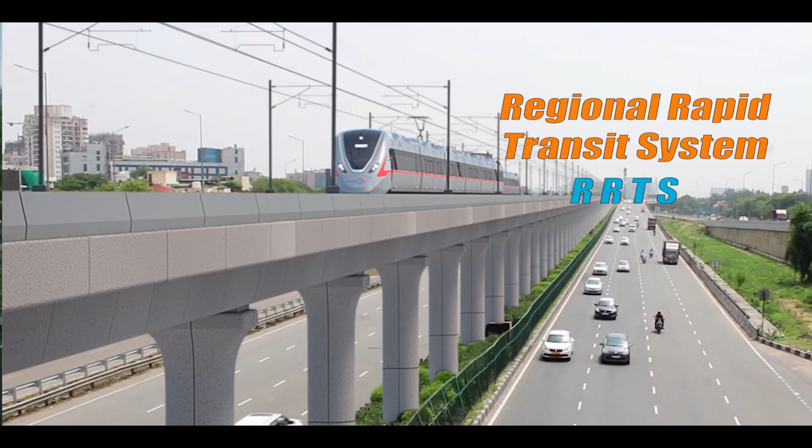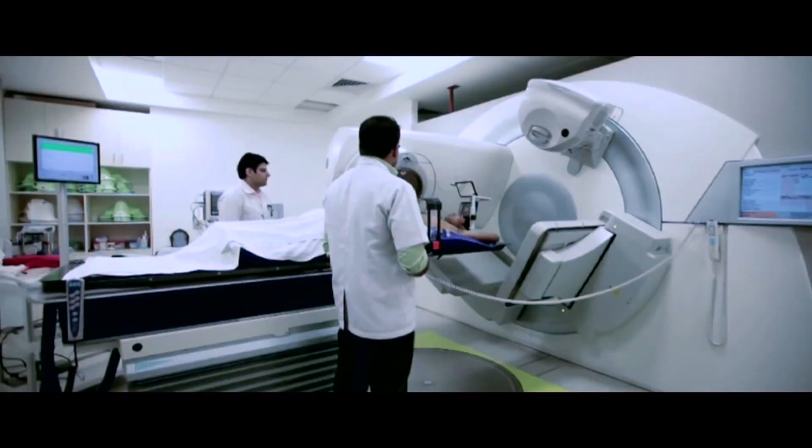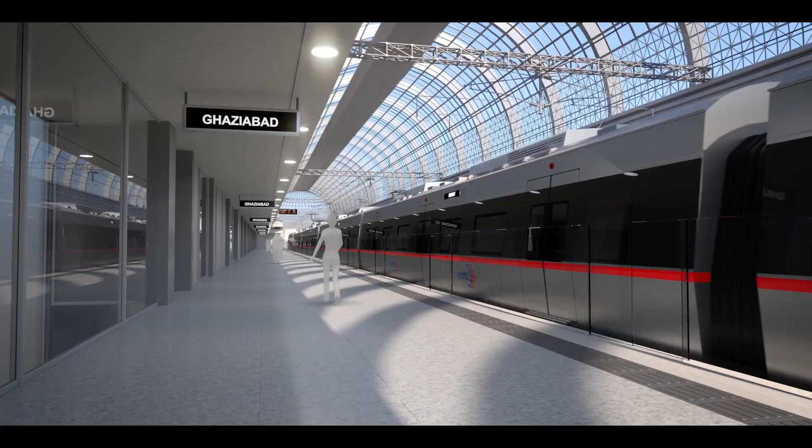RRTS, Regional Rapid Transit System, is a transformational urban transport project. It will empower people by providing them improved access to education, employment, healthcare and economic opportunities, and also address issues of pollution, congestion and ever-expanding urban sprawl. It aims to improve the quality of life of people by providing fast, reliable, safe, comfortable and sustainable mobility solution, enabling economic development in NCR.

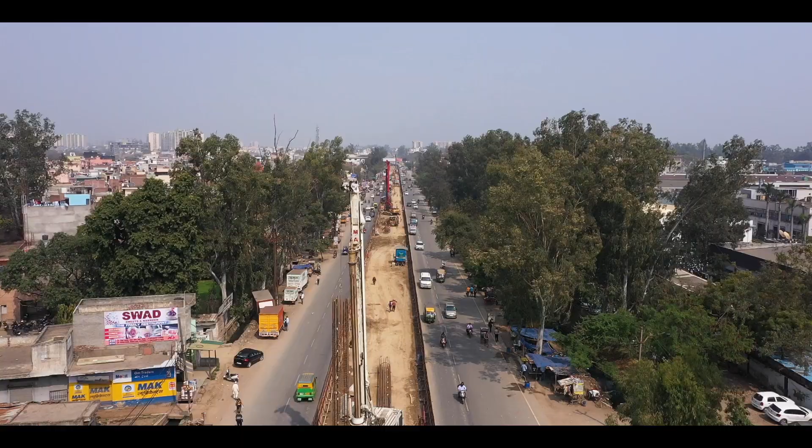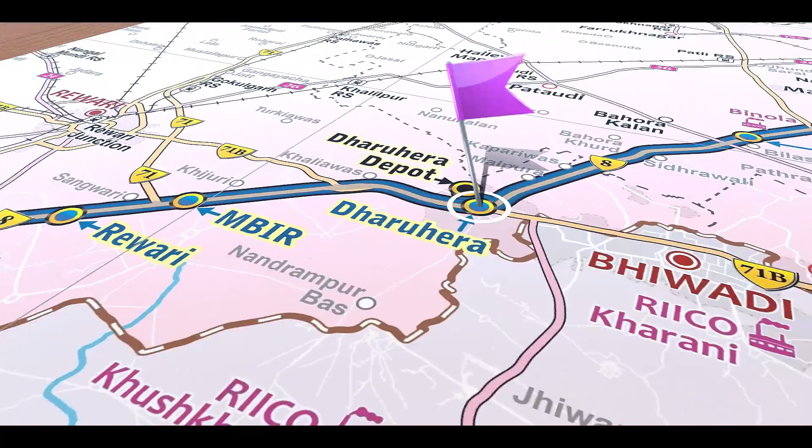NCRTC is constructing India's first regional rail network in its national capital region to connect regional urban centers such as Sahibabad, Ghaziabad, Meerut, Gurugram, Manesar, Dharuhera, Bawal and Panipat with national capital Delhi like never before.

RRTS is a high-speed railway system where the design speed is 180 km per hour. This kind of railway system has never been attempted in the country, neither by the Indian Railways nor by metro companies. So, due to lack of any benchmarking or common standards, it is a big challenge to implement this kind of project in a very short time frame.

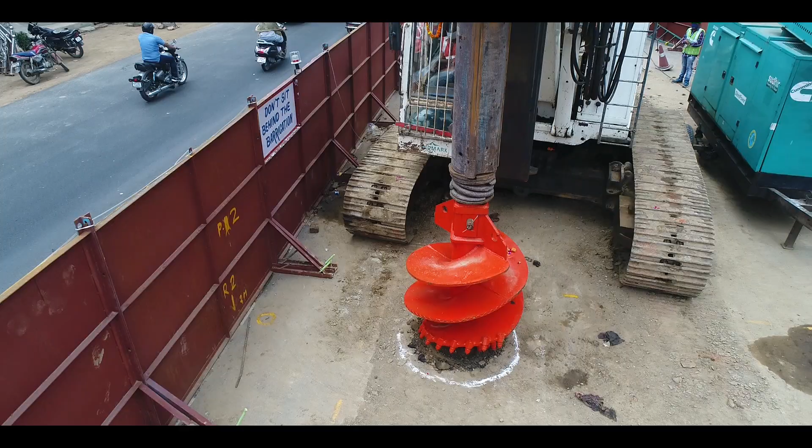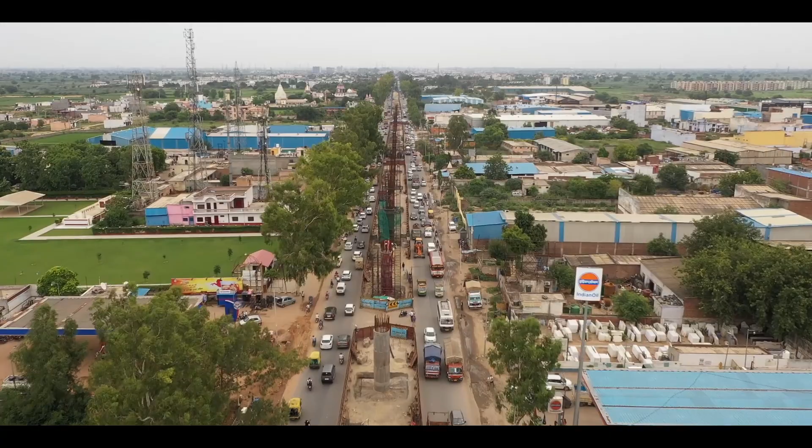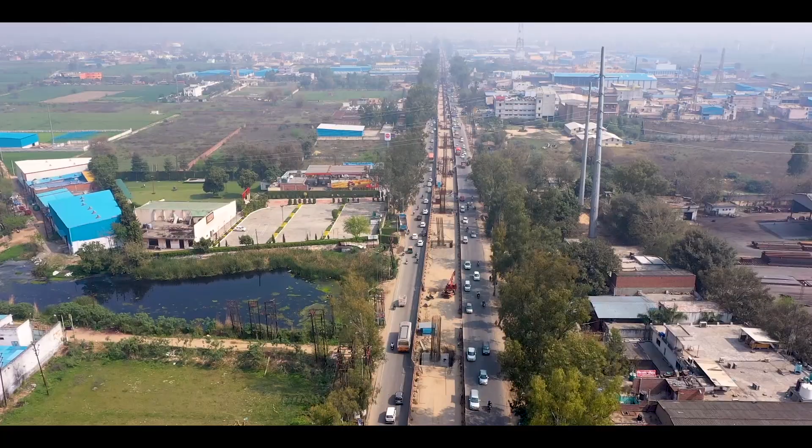Honorable Prime Minister laid the foundation stone of first RRTS corridor between Delhi, Ghaziabad and Meerut on 8th March 2019. Within 3 months, civil construction work was started in the true spirit of Gati se Pragati, so as to meet the challenging task of commissioning the 17 kilometer long priority section of the corridor from Sahibabad to Duhai by 2023. The entire 82 kilometer long Delhi Ghaziabad Meerut RRTS corridor will be operational in 2025.

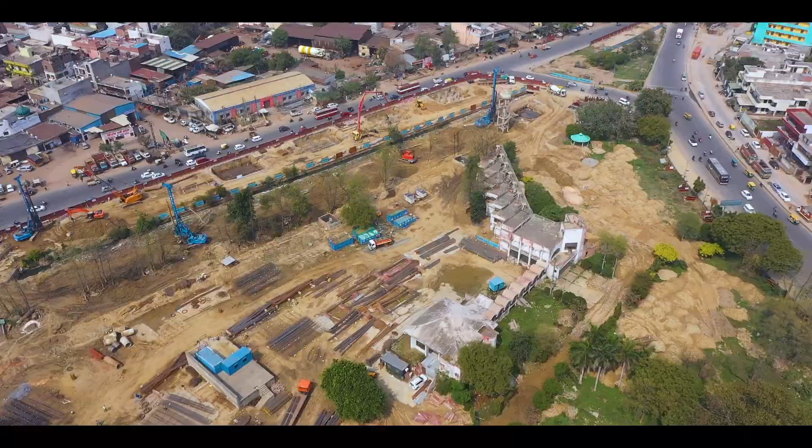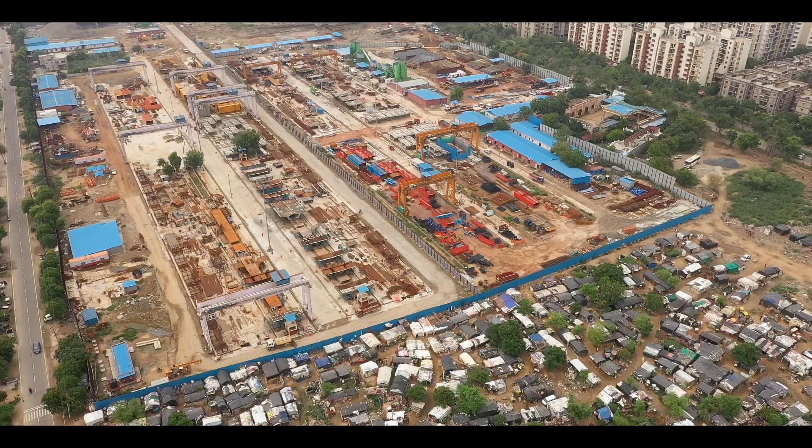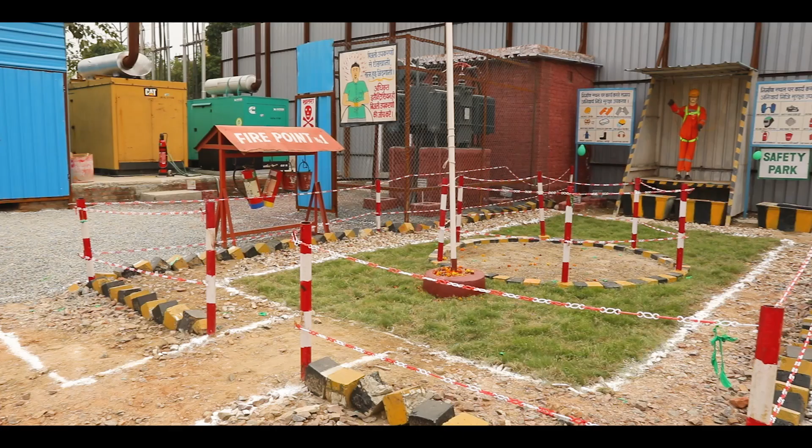In the past 1 year, NCRTC has made significant progress. Almost all pre-construction activities in the priority section have been completed. Project site offices have been established. State-of-the-art casting yards at Vasundhara, Ghaziabad have been set up for casting of segments, with facilities such as batching plant, quality labs, safety park, labor training and healthcare.

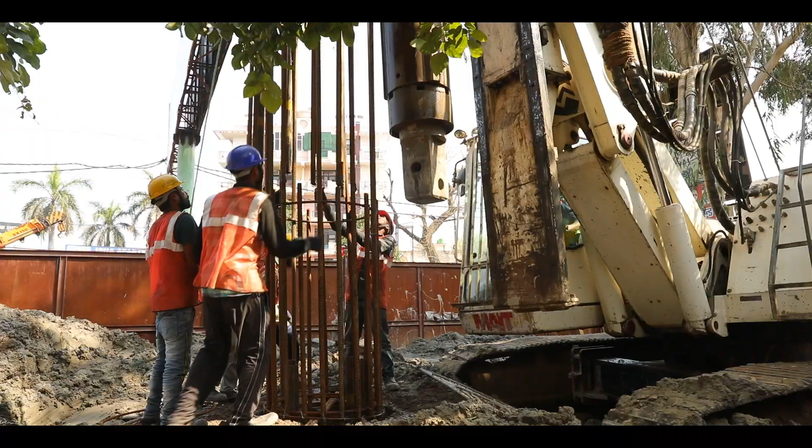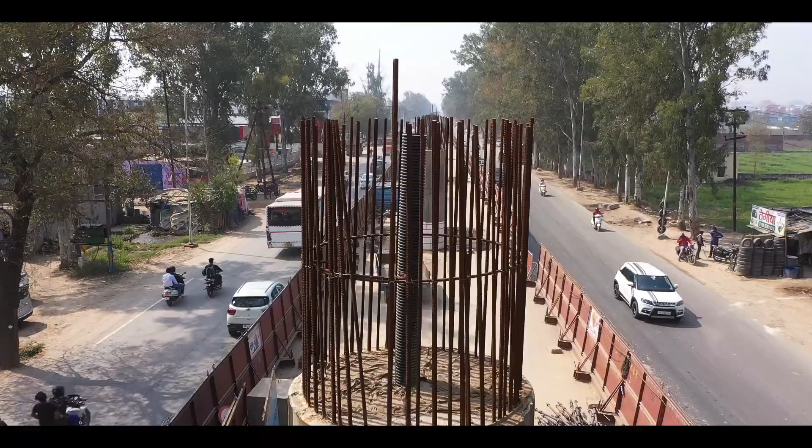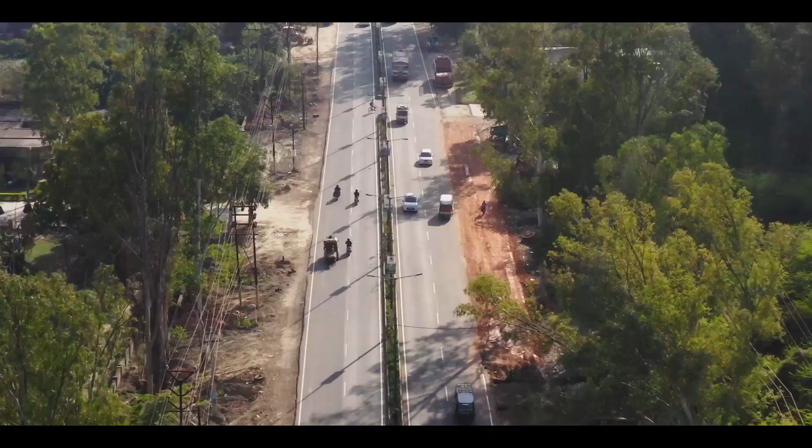At present, civil construction on more than 50 km of the 82 km long corridor is in progress. About 1800 foundation piles have been done, covering around 12 km of corridor length. 50 piers have been erected, and Sudarshan, the launching gantry, is being assembled for launching of girders to construct the superstructure of the viaduct. Besides this, bids have also been invited for civil construction of the remaining portion of the corridor.

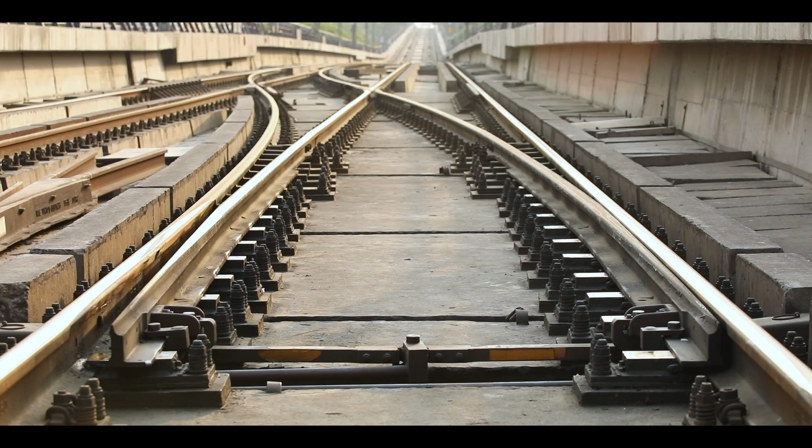All major system contracts such as signalling, track, electrical are in advanced stages of finalization. The rolling stock contract has recently been awarded under the Make in India initiative of the Government of India.

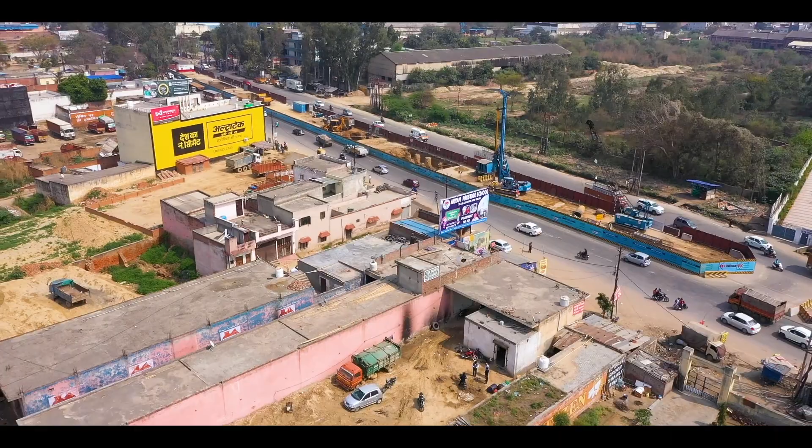This has all become possible due to the clear vision, well thought-out strategy, committed leadership, advanced detailed planning and risk mitigation measures adopted by the NCRTC team.

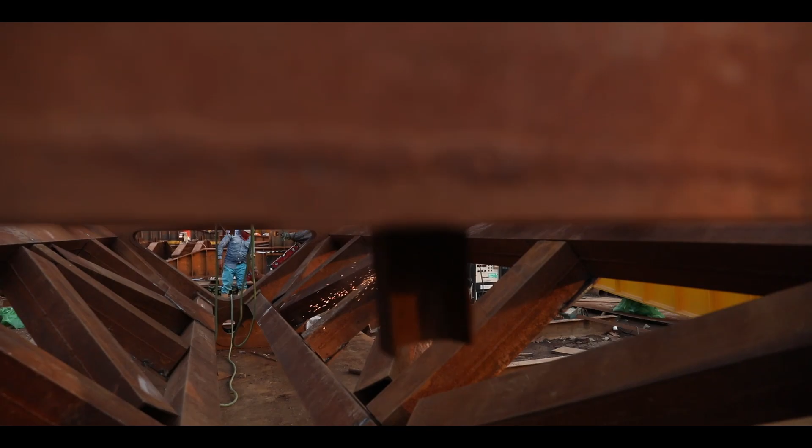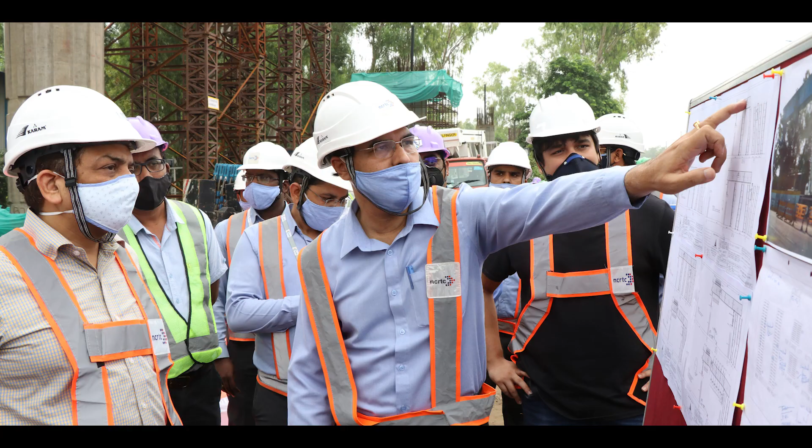I was the first employee of this corporation in July 2016. In the last 3 years, I have developed a team of committed experts with domain knowledge of public transport, domain knowledge of railways, domain knowledge of planning in an integrated way with other systems, and domain experts of finance and strategic planning.

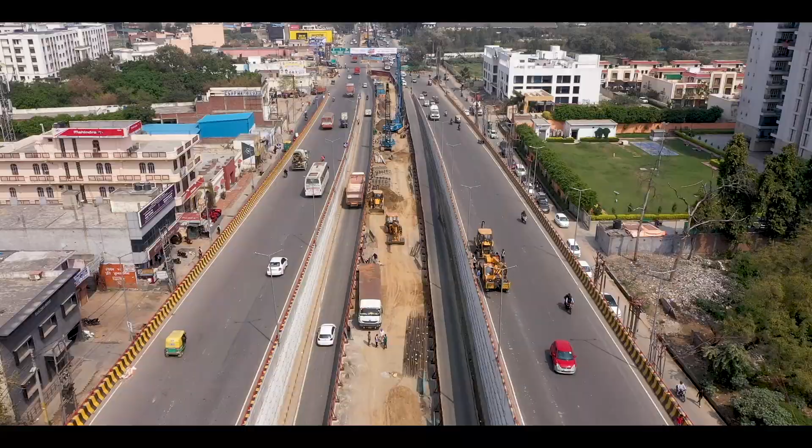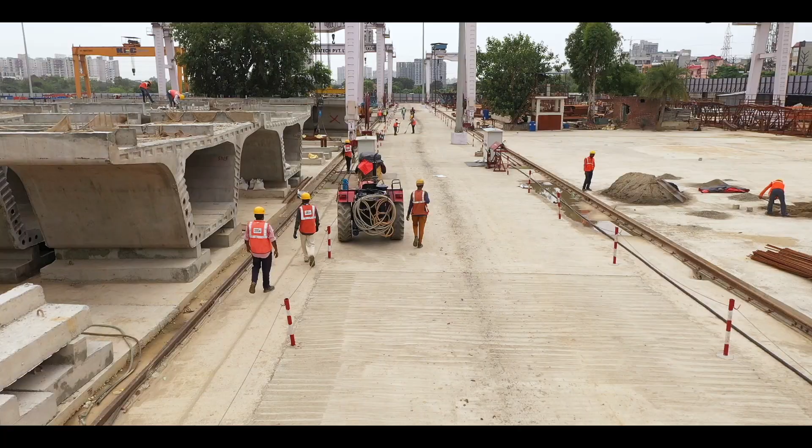This has helped us in handling this complex project, which has complexities and challenges on the technical front as well as on project structuring and implementation. Our focus is to create a committed team of passionate people of high integrity.

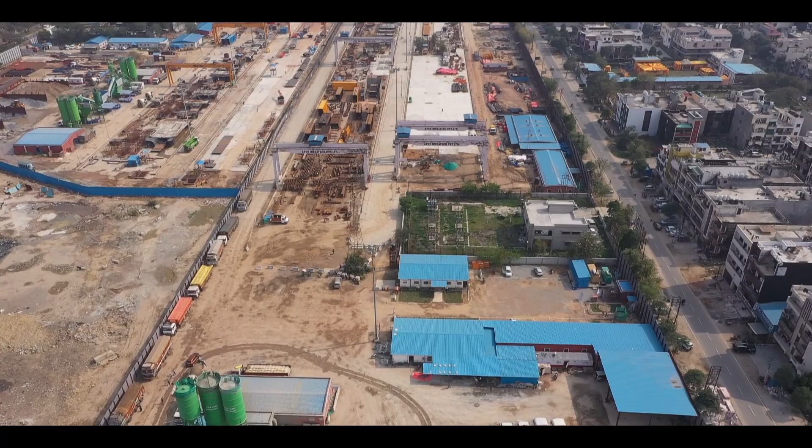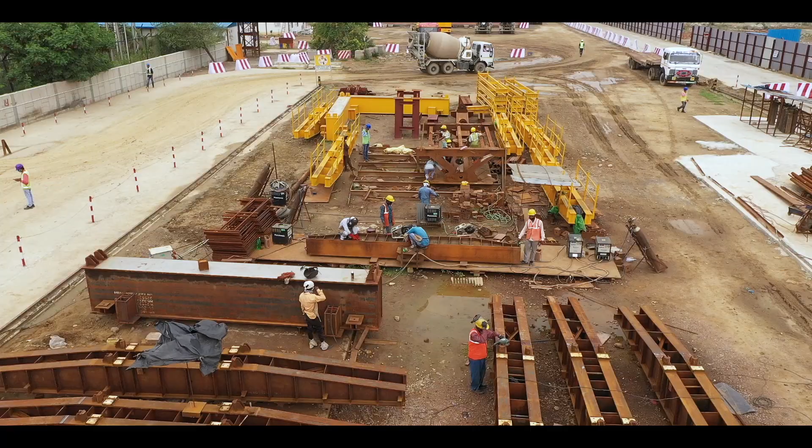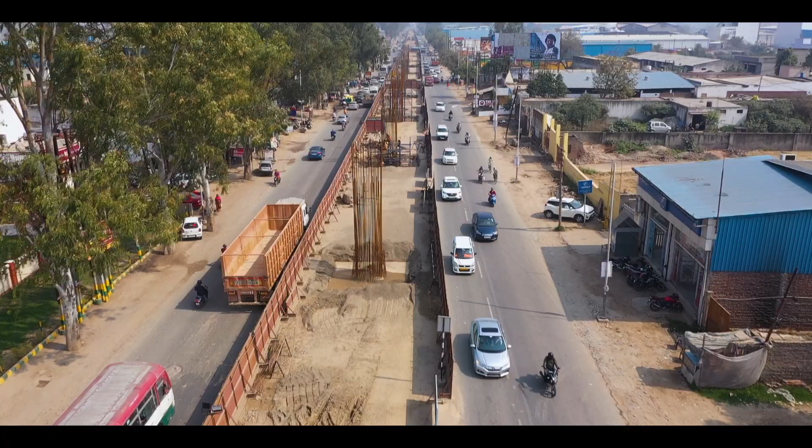The last 1 year has been full of challenges and achievements. Such complex projects require a lot of preparatory work before implementation. If we start this preparatory work after the sanction of the project, it takes 1 to 2 years only in these pre-construction activities. NCRTC had been particular in strategically planning the implementation of the project by executing pre-construction activities before actual implementation. In fact, some of the pre-construction activities we started before the sanction of the project.

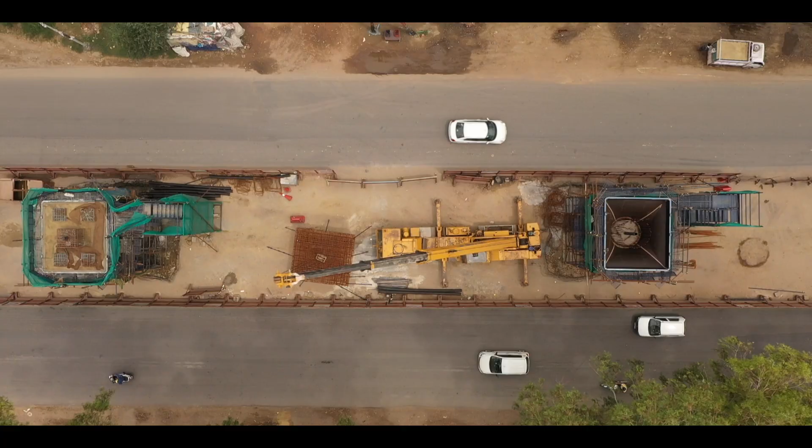We have shifted the utilities, we have interacted with the stakeholders to clear the sites for the main contractors. This has been our strategy, to give very, very clear sites with all approvals and all drawings to our contractors. That has paid good dividends, and the project has taken off very fast.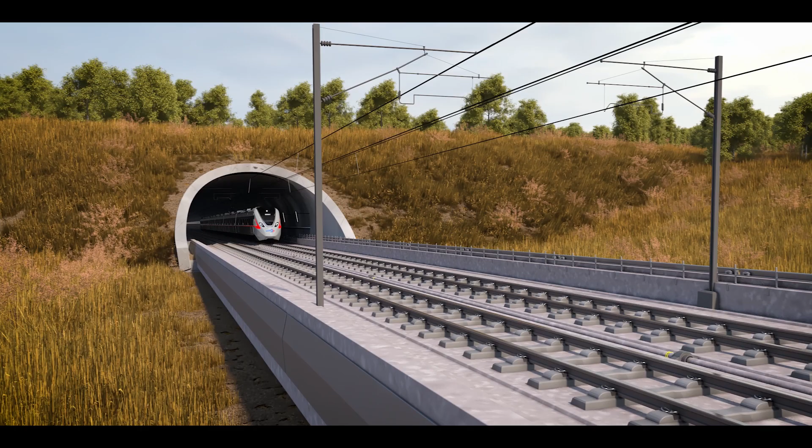NCRTC is executing a public transport project which will be used by masses. Since its inception, efforts have been made to inculcate values of customer centricity and citizen centricity among all NCRTC employees. Every team member takes decisions based on this first principle.

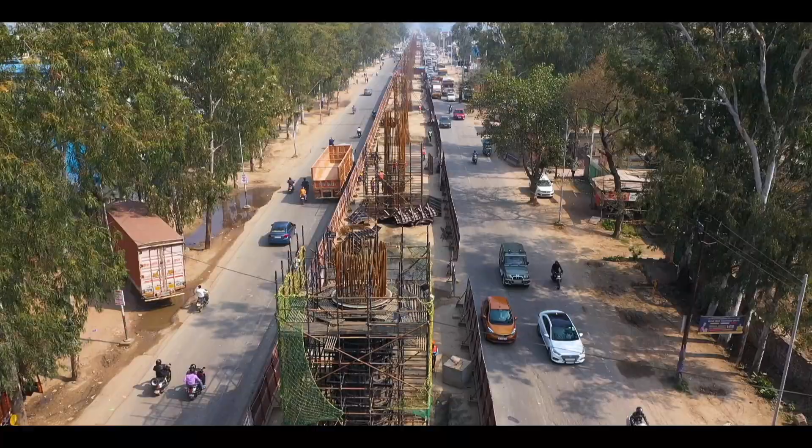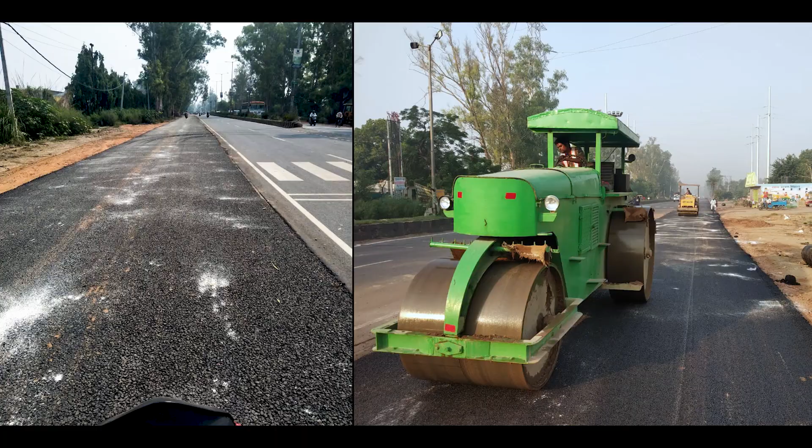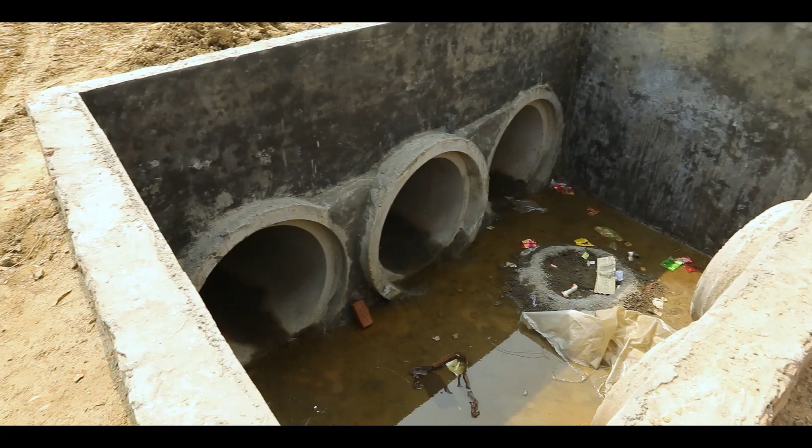Before starting the construction work on the ground, proper planning was done to ensure that ongoing traffic is not affected and there is no inconvenience to the local residents during construction. Roads were widened on both sides wherever necessary to ensure smooth movement of traffic at the time of construction. High electrical transmission lines, underground electric cables, telecom lines, gas pipeline, water pipeline and sewage lines have been relocated or modified which were infringing the corridor.

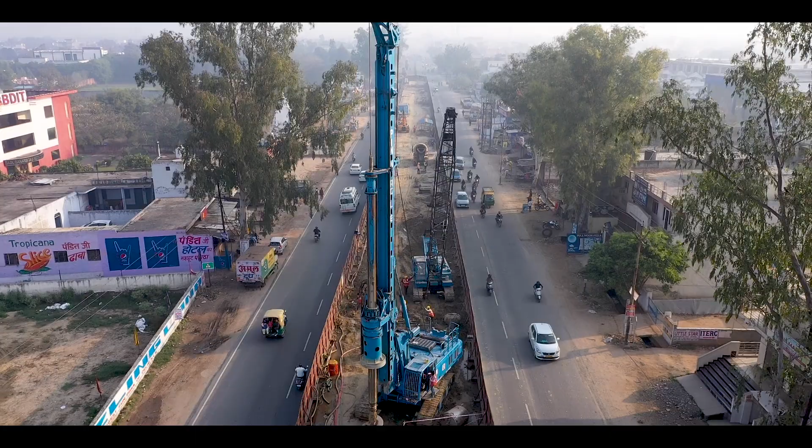Till now, 24 EHT lines have been shifted. Safety of public was ensured by doing construction within adequately barricaded zones with no public access at all. Traffic marshals have also been assigned for safe pedestrian crossings and smooth flow of traffic.

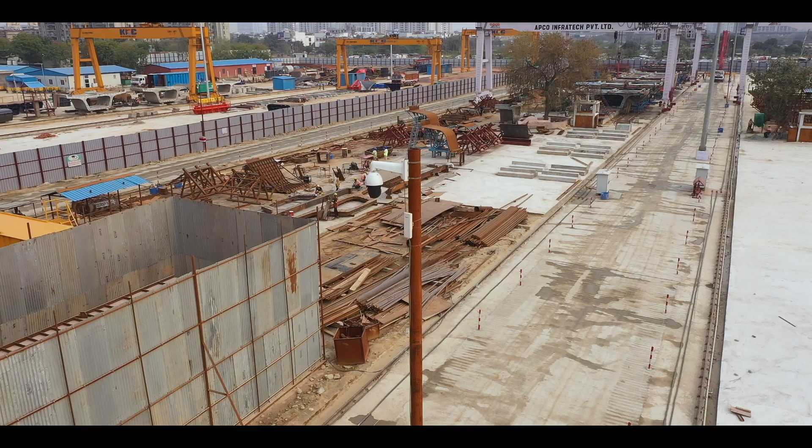7 foot-over bridges are also being constructed at various places to facilitate safe movement of pedestrians. A 24/7 CCTV monitoring is being done to keep constant watch on construction activities. It also helps in ensuring that everyone enters the construction sites with full personal protective equipment for their safety.

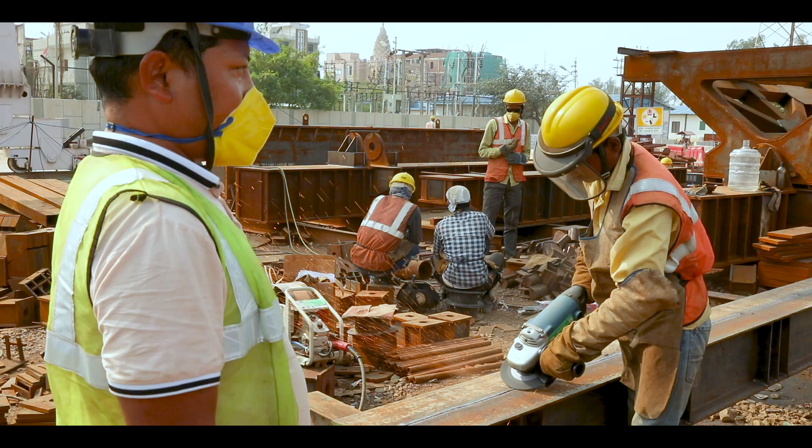RRTS project is being implemented in 4 states as a common integrated solution for seamless mobility consisting of the NCR region. It is a multi-stakeholder project which makes it very complex, but we have been getting very good cooperation from all the state governments and officers, authorities, agencies which are working with us. That has made the implementation of the project comparatively easier.

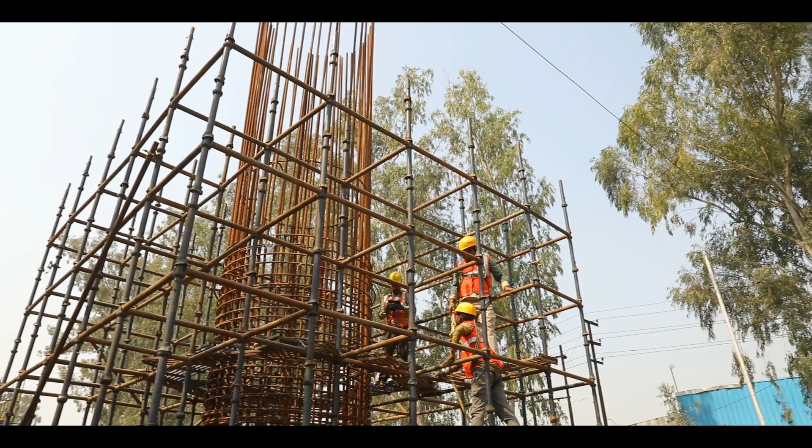Once stakeholders have understood the advantage to the public, they have come with all the support to us, and now there is a demand for extension of all the 3 corridors by the state governments in all 3 directions.

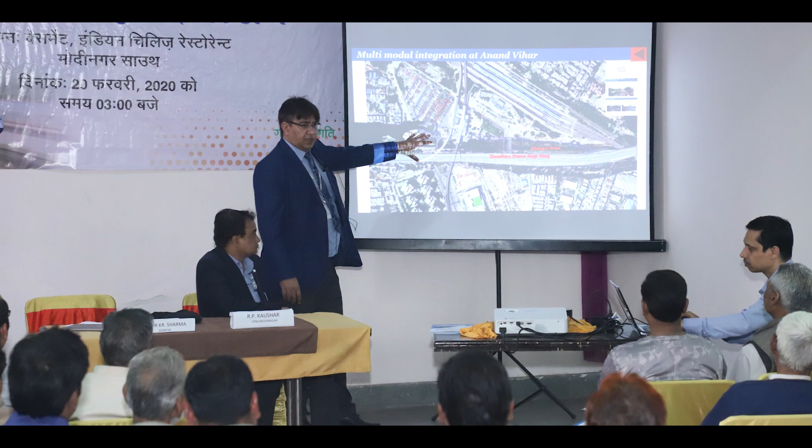Consistent community engagement is essential for the smooth execution of large-scale public transit projects like RRTS. NCRTC has organized various community interaction programs along the alignment of the Delhi-Ghaziabad-Meerut RRTS corridor. People are not only apprised of the ongoing developments, but are also encouraged to share their ideas and suggestions during these CIPs. Locals are duly sensitized about the construction plans, steps being taken to minimize inconvenience to the public during construction, and about various socio-economic benefits that this next generation mobility infrastructure will deliver.

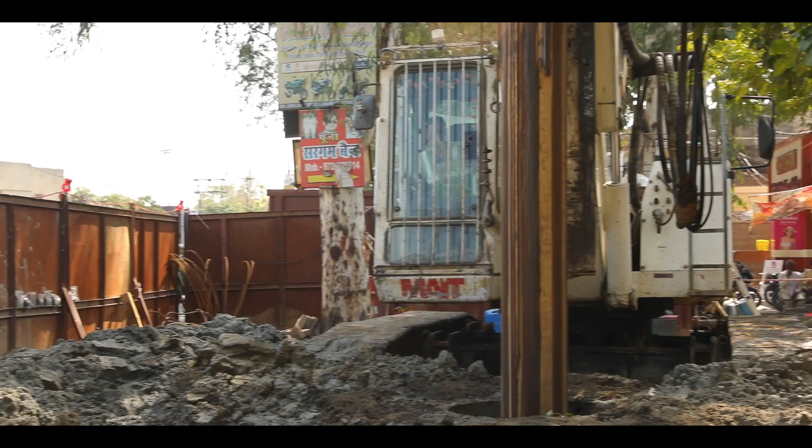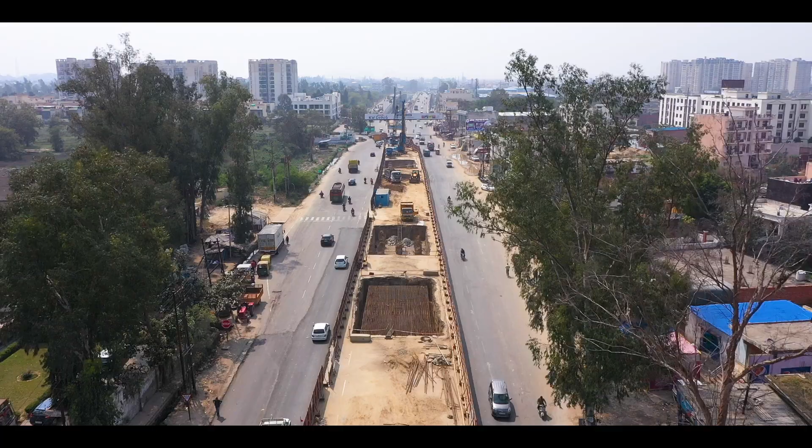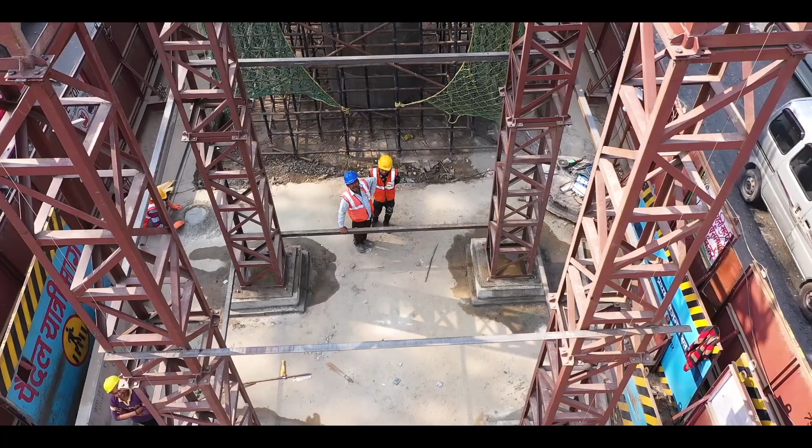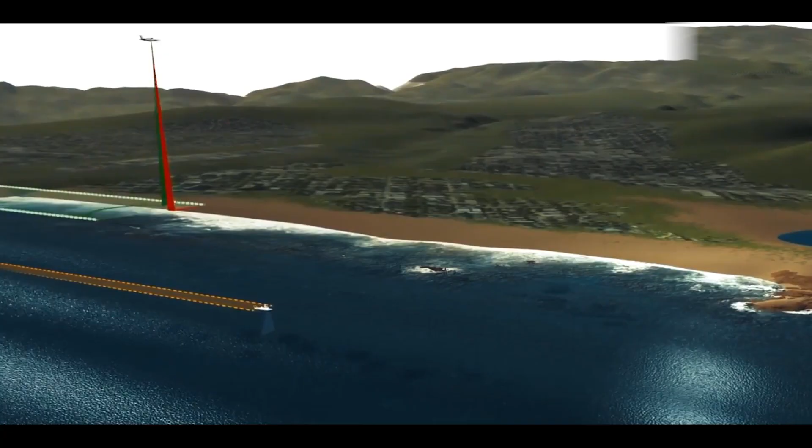In this challenging infrastructure project, various new technological advancements are being implemented for the first time in the country. These technologies are not only for ensuring smooth working at construction sites, but are also helping achieve the goal of construction with zero accidents. Some of these technologies are BIM, Building Information Modeling; VR, Virtual Reality; CDE, Common Data Environment; GIS, Geographic Information System; and CORS, Continuously Operating Reference Stations.

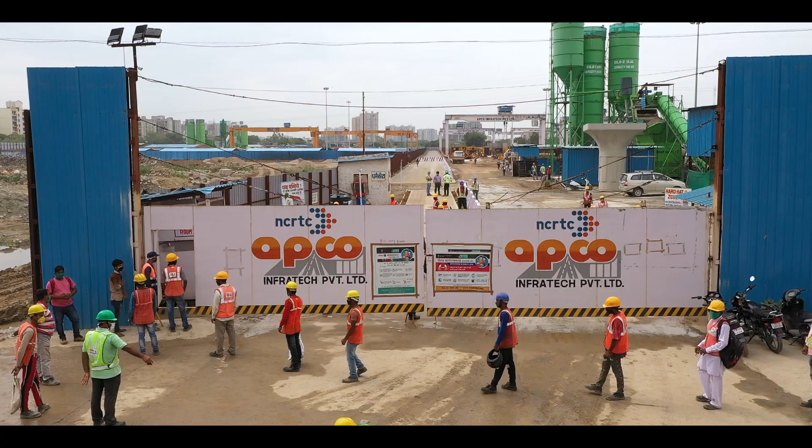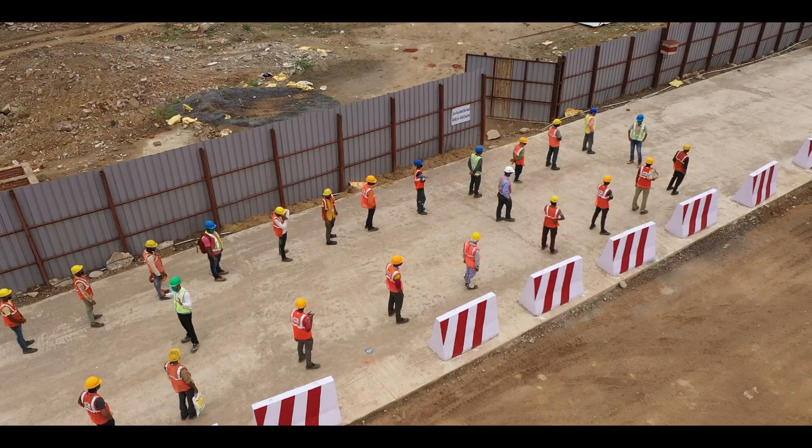The country has been facing unprecedented challenges due to the COVID-19 pandemic. NCRTC is committed to do whatever is necessary to fight the pandemic. The construction work that had to stop during the lockdown has now resumed in accordance with Government of India guidelines. A standard operating procedure has been developed and is being adhered to by all to maintain social distancing during construction work. In these difficult times, NCRTC has provided the best possible facilities to its staff

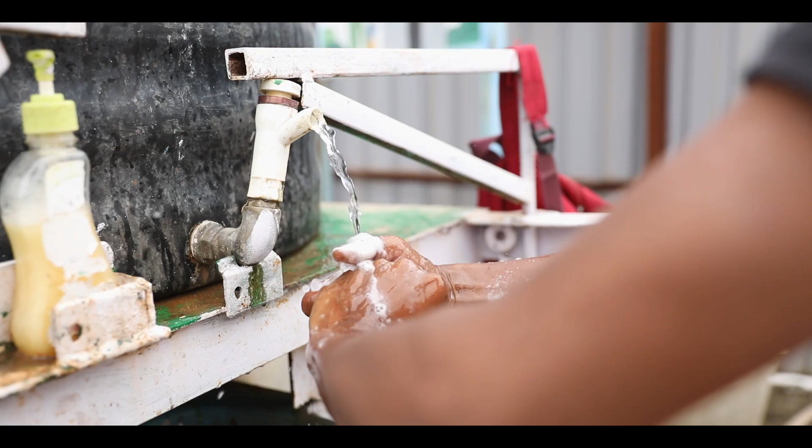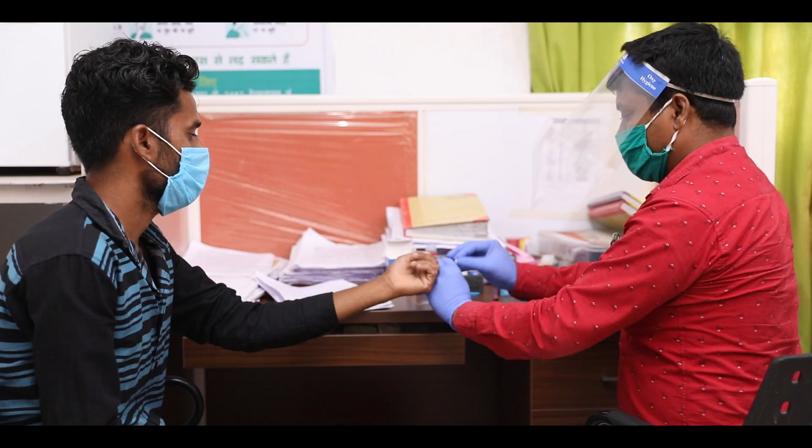and to construction workers such as provision of adequate number of masks, sanitizers and soaps. Time to time health checkups are being done to inculcate enough confidence among employees for doing quality work.

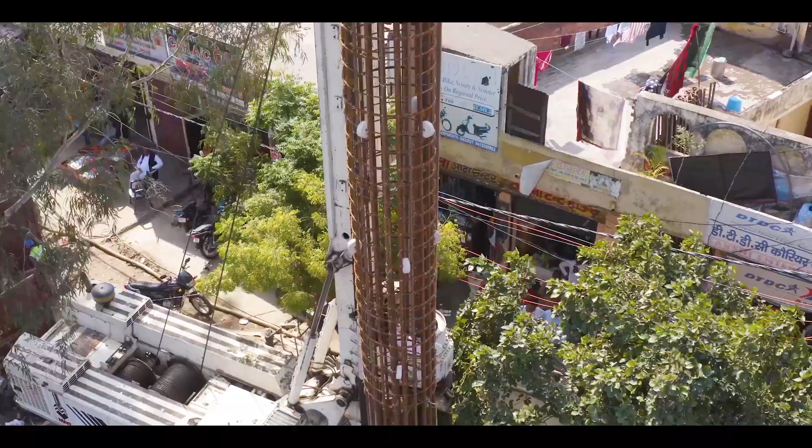All these efforts are being done by NCRTC to deliver the project on time, within the sanctioned cost, and fulfill its commitment. We worked on the project to make it as commuter centric as possible. Our focus has been on making it comfortable, safe and fast for the commuters, and to ensure ease of travelling for everybody using public transport. That is why our focus in planning is on multimodal integration.

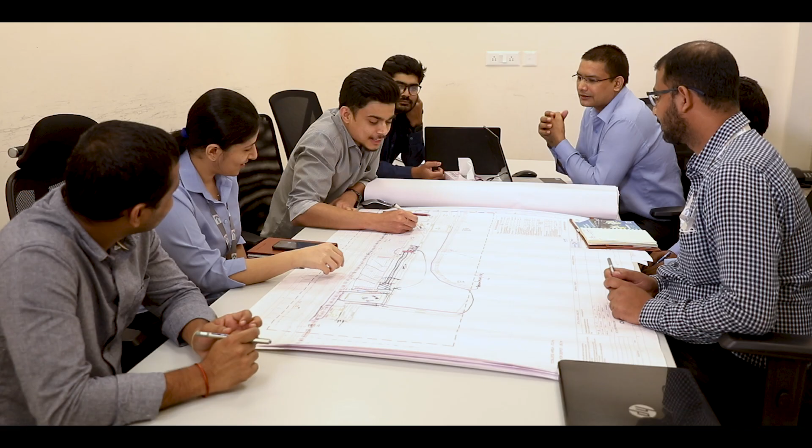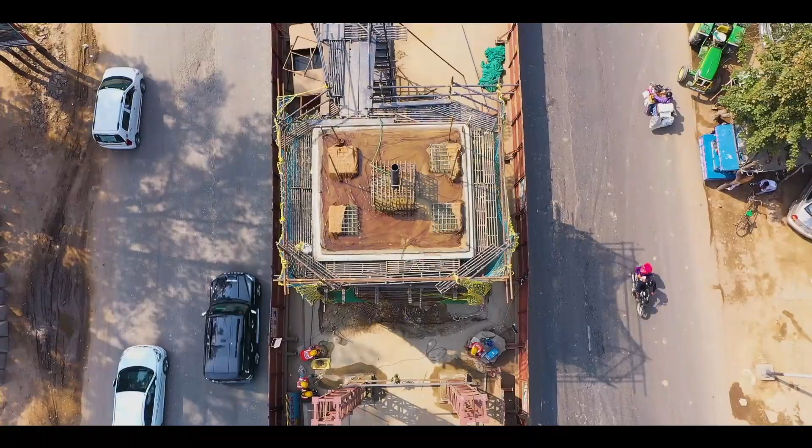Now is not the time to take the foot off the accelerator. We aren't settling for good or better. We are aiming for the pinnacle. All our efforts, success and hard work of the past culminate into our promising tomorrow, to grow better and faster than ever before. Gati se Pragati.